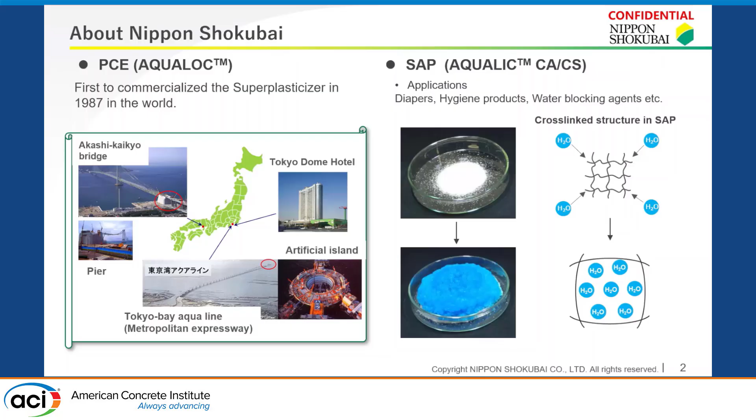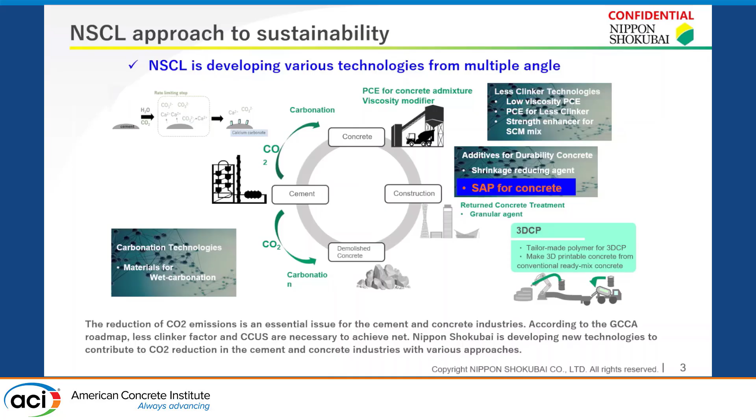As you know, the reduction of carbon dioxide emissions is an essential issue for the cement and concrete industries. To contribute to the realization of sustainable societies, we have recently been developing various technologies for sustainability, such as less clinker, durability, 3D concrete printing, and carbonation. As part of our activities, we are focusing on superabsorbent polymer for concrete, utilizing our knowledge of cementitious materials and SAP.

Numerous studies have indicated SAP can provide multiple benefits on concrete properties. After mixing, SAP can absorb a lot of water, as much as 10 times its own weight. And as relative humidity in concrete decreases, SAP releases water and cement hydration gets promoted accordingly. Strength and shrinkage of concrete are improved, which is referred to as the internal curing effect.

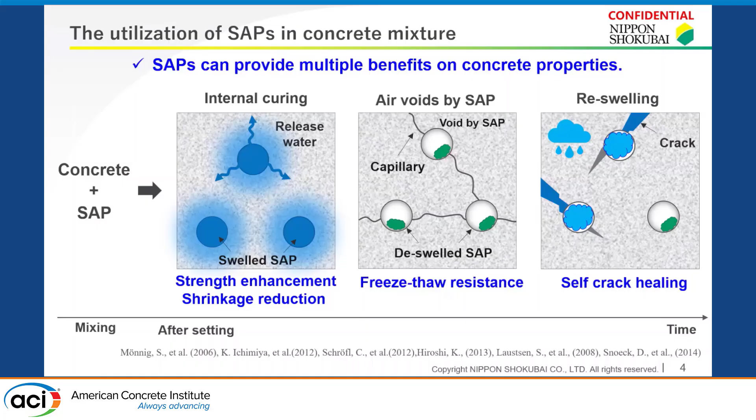Furthermore, air voids created by SAP can enhance freeze-thaw resistance of concrete, acting as a substitute for entrained air. And SAP also shows a self-healing effect on cracks through re-swelling. Despite these advantages, the widespread use of SAP in concrete has not yet been realized. We will explore the reasons behind this.

When conventional SAPs are added to fresh concrete, the flowability of fresh concrete is significantly reduced, because conventional SAP absorbs a lot of water quickly. To reduce the impact, if extra water is used, of course, it is impossible to achieve good physical properties of concrete. We think these concerns cause the limited practical use of SAP in the concrete field.

We expected that SAP with slower absorbing behavior would be able to achieve both good handling and good physical properties. Therefore, it is crucial to develop SAPs that have slow absorbing behavior. And how is the slower absorbing behavior achieved? In the next slide, I'll explain our new design for slow absorbing SAP.

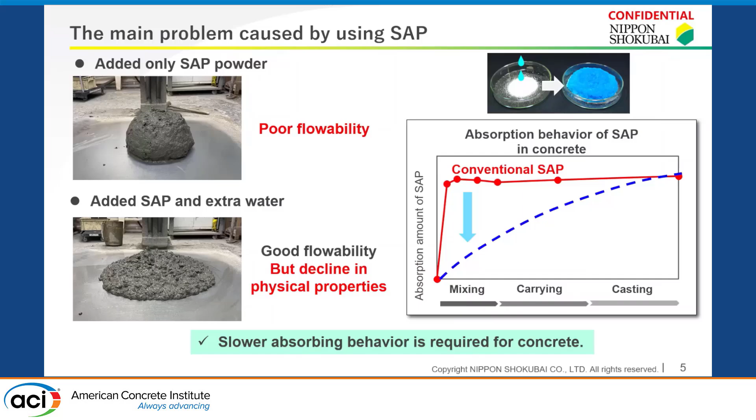This slide presents our new design of the cross-linked structure of SAP for slow absorption. Conventional SAP, which is based on acid salt monomers, can absorb a lot of water quickly due to osmotic pressure and electrostatic pressure. This raised the flowability issues, as I mentioned earlier.

To address this, we've developed a new design concept that incorporates non-ionic groups and stimuli-responsive units into the SAP structure. By replacing acid salt groups with non-ionic groups, we can weaken osmotic pressure and eliminate electrostatic pressure, allowing for gradual absorption.

Furthermore, the combination of non-ionic groups and stimuli-responsive units enables the SAP to increase its absorbing rate as these responsive units gradually cleave in concrete. This innovative approach is expected to enhance the internal curing effect by supplying water to the cement as relative humidity decreases.

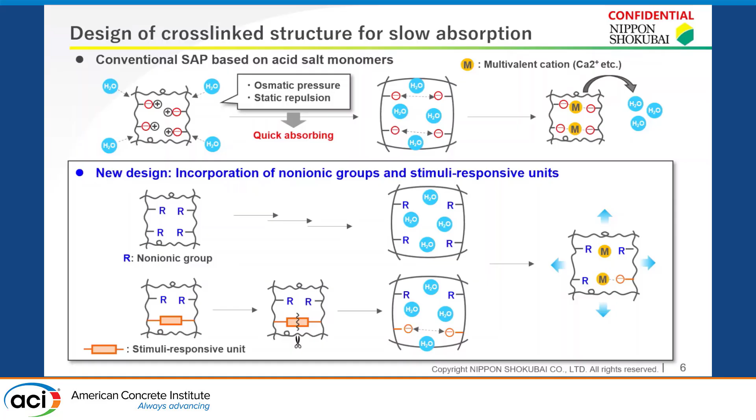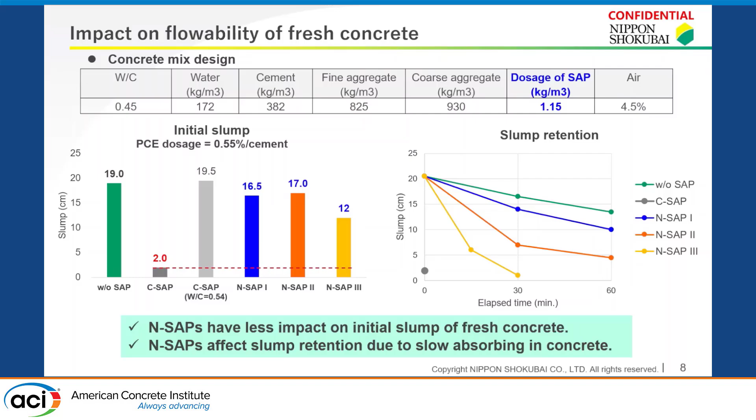This slide highlights the impact of our new SAPs on the compressive strength. We compared the compressive strength after 28 days. When conventional SAP was used along with extra water, there was a significant decrease in compressive strength. In contrast, our new SAPs show strength enhancement compared to control mix without any SAP.

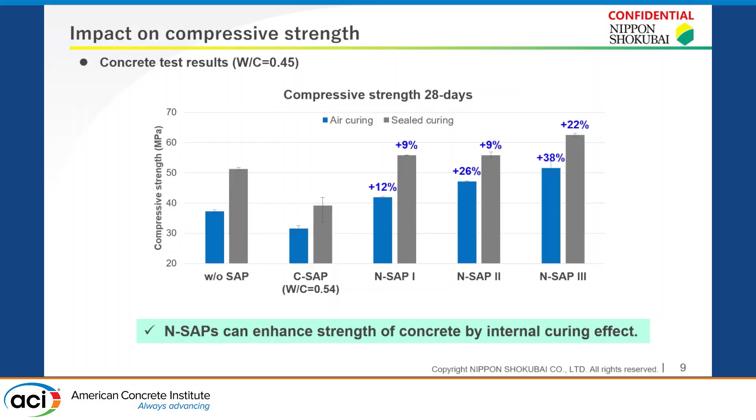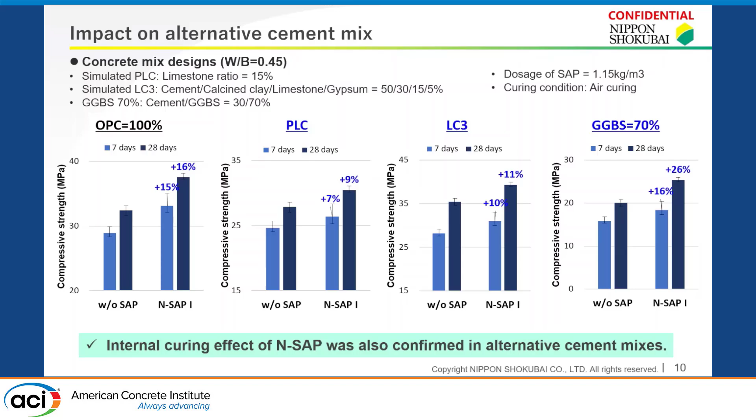And this data indicates even in alternative cement mixes, our new SAP1 can enhance strength effectively. So we believe our new SAPs are effective not only in traditional conventional concrete, but also in alternative cement mixes.

In this slide, we evaluated the relationship between GGBS ratio in binder mix and compressive strength. This data indicates by increasing GGBS ratio in binder mix, we can reduce the amount of cement by more than 10% by using our new SAP1.

And we successfully conducted a production scale test at a real precast concrete plant, fabricating a slab and U-shape together using 80% GGBS mix combined with our new SAP1.

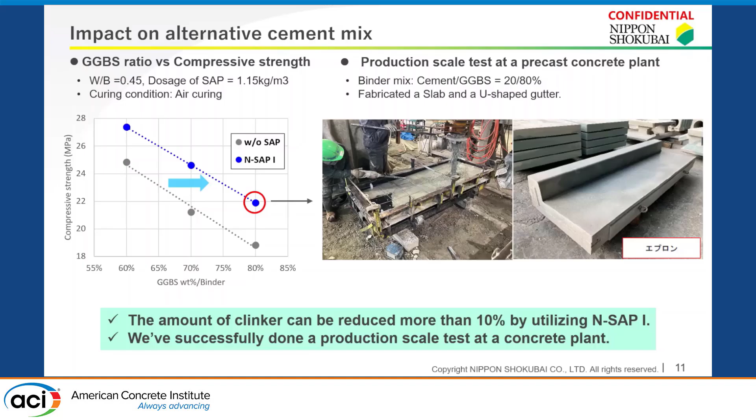Now let's turn our attention to the impact of SAP on shrinkage. From our original shrinkage test with two different mixes, one with 100% Portland cement and another with 70% GGBS, this data shows our new SAP1 can minimize autogenous shrinkage in both mixes. So yeah, previous studies have reported SAP can reduce autogenous shrinkage, and we confirmed our new SAP also has good properties to reduce autogenous shrinkage.

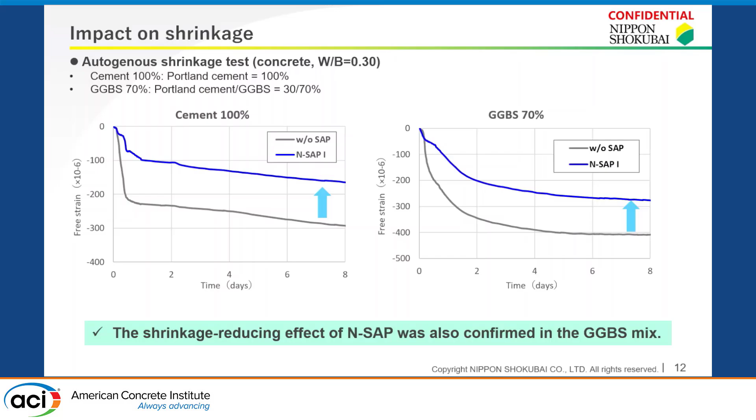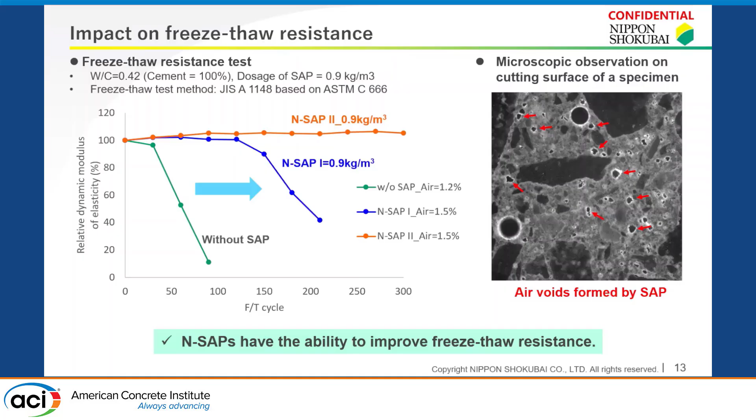On this slide, we focus on the impact of SAP on freeze-thaw resistance. We have confirmed that our new SAPs can significantly improve freeze-thaw resistance compared to control mix without SAP. And these air voids created by SAP act similarly to entrained air.

Now I'll talk about the potential of our new SAP as admixtures for 3D concrete printing. As I mentioned earlier, our new SAPs have slow absorbing behavior and good properties that enhance concrete properties. On the other hand, 3D concrete printing is one of the promising technologies that contribute to good productivity and lower environmental impact. But it requires precise rheological control to ensure good buildability and good physical properties under harsh drying conditions. So we believe our new SAPs can serve as innovative admixtures for 3D concrete printing.

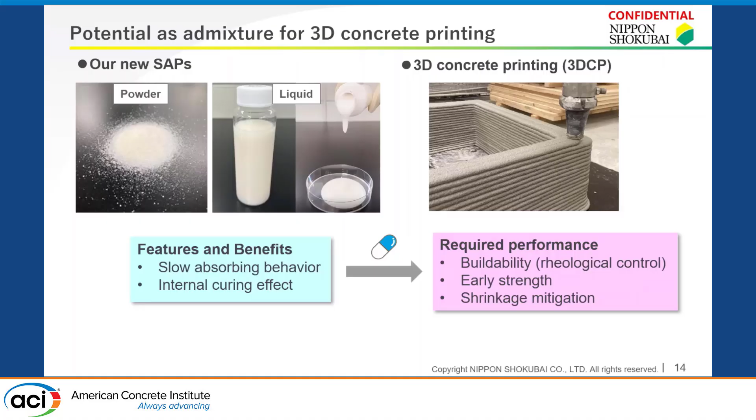This slide presents the test result for buildability with a mortar mix designed for low carbon concrete. We used new SAP3 as a liquid type, expecting its application for a two-component system in 3D concrete, which has a secondary mixing process just before extrusion. And we evaluated buildability by measuring yield stress of the mortar mix through a penetration resistance test.

This graph shows the mix with SAP liquid showed improved yield stress behavior compared to the mix without SAP. So further study is needed, but we believe our new SAP can improve buildability for 3D concrete printing.

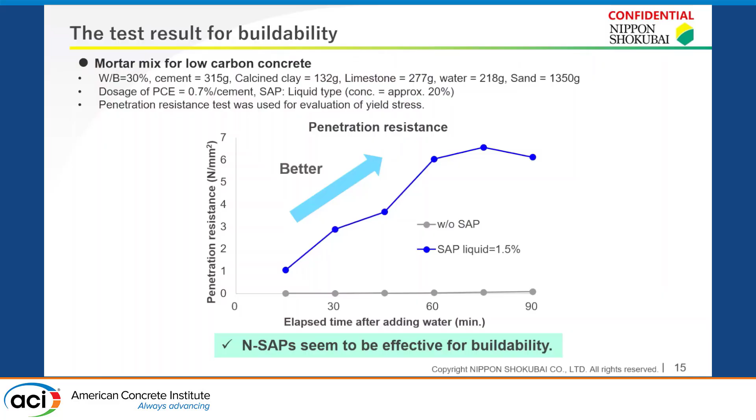Finally, I'd like to summarize the key points of my presentation regarding our new SAP. We believe that our new SAP can play a vital role in improving sustainability of concrete. That's it.